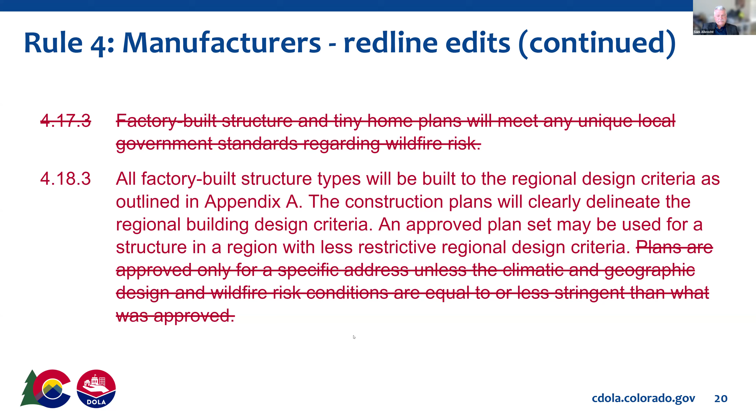Approved plans are considered approved until the division amends Chapter 2 Codes and Standards. I might actually need to change that to 'rulemaking' or 'the State Housing Board amends Chapter 2 through a rulemaking process,' because the division cannot amend those rules.

Now we start talking about audits. Manufacturers may be audited per procedures established by the division. I want to stop here for a second to discuss this. What I'd like to do is recommend to the TAC that we take the audit details out and move them into a separate document, where we have flexibility at the division level to make changes in frequency or the audit process, taking that outside the administrative rules.

If that is a concern for anybody, or if the manufacturers have seen better models in other states, let me know. If it's a concern, we could put in what our minimum audit procedures are, subject to division increases as necessary to ensure quality control and life safety issues. We could come up with some wording to change that a little. But what I'd like to do is have the procedures set out separately for manufacturers in a separate document, very similar to our MHIP for installation. That's a separate document that we control on our audit procedures.

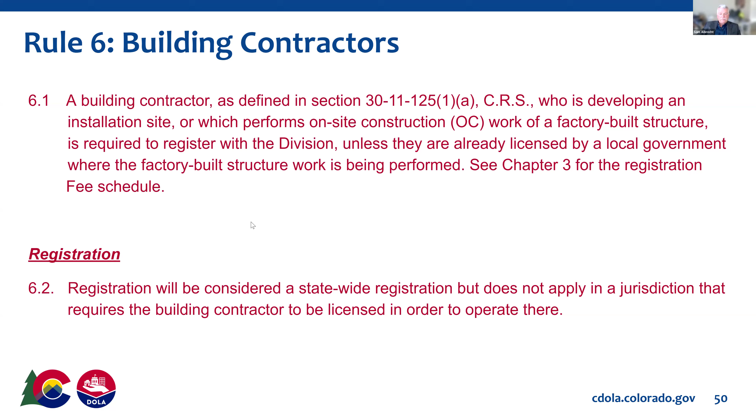We're throwing this out for input also on proof of general liability insurance, a minimum bond, names of principals of the company, proof of factory-built structure education provided by or through the Division of Housing, and we probably need to add here, or other approved education providers, and certificate of good standing from the Colorado Secretary of State.

Pretty similar to what we learned from finding how the local jurisdictions are doing their contractor licensing.

And then 6.4 is the contractor education requirement that will be required of all general contractors working on factory-built structures, whether or not they are licensed by the state, registered with the state, or licensed by a local jurisdiction. All contractors will have to take this education.

Now, the responsibility of that, we tried to talk through that a little bit. Building contractors may be responsible for the following activities. And then who's going to be doing that?

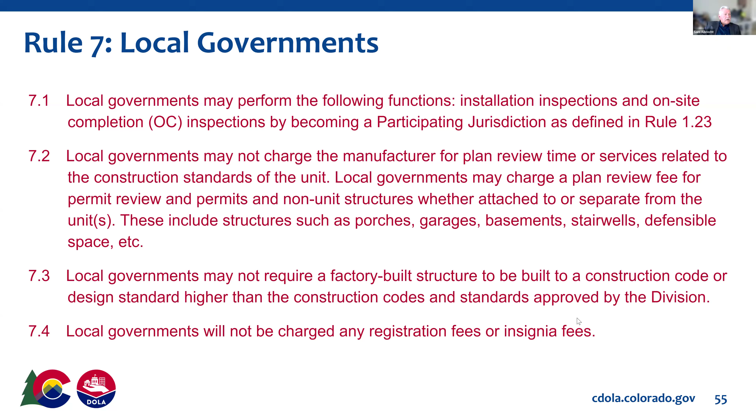Other state agencies: the division is responsible for all factory inspections for in-state and out-of-state factory construction. This includes electrical, plumbing, gas, construction, fire suppression, and wildfire structure hardening. Under 8.2, the division is responsible for all inspections related to completion and installation of the unit on site. Connections to utilities is the responsibility of the local jurisdiction, which may defer these to other state agencies such as DORA and DFPC. I break it out specifically by plumbing connections.

I mentioned also, and I want to revisit this if you didn't catch it: the installation of gas piping on the service must be completed by a qualified gas piping installer. That was in the statute, but from my understanding, I seem to recall a discussion about whether or not a qualified gas piping installer existed.

Can anybody refresh me on that? Tim? That was my question. I'm not familiar with any. Well, it's not on the state side. John, I see John's there.

At the plumbing board, plumbing rules exclude gas. So a non-licensed plumber can do gas line, residential and commercial, and the same thing with inspections, at least from local jurisdictions - you don't have to have a licensed plumbing inspector do the gas line. So that was a couple of comments to get clarified. Maybe John's got his hand up. Thanks. Yeah, John?

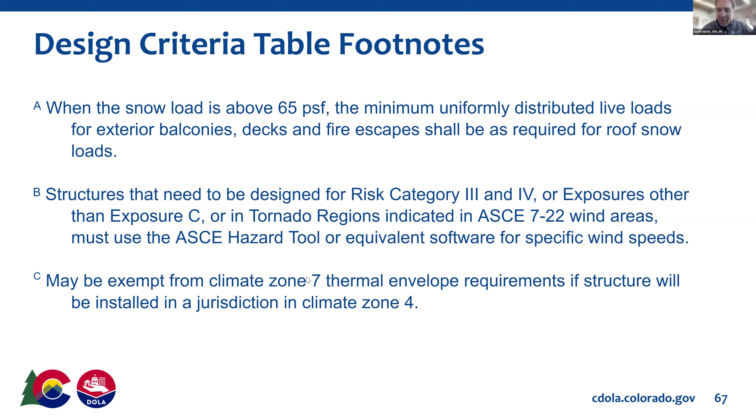But if I'm a factory and I want to build at spec, say a dozen single family homes that meet a 60-pound snow load, which puts me in the chart - it's off now so I haven't memorized it - whatever zone that 60-pound falls in, and whatever zone a 130-mph exposure C wind falls in, and so forth, I can go ahead and build a dozen homes meeting that criteria, and those homes can go in any location in the state that meets up to that design criteria. So that's my understanding of the real purpose of going through this exercise. It's going to be for the benefit of factories to be able to, maybe not mass produce, because there'd be some risk of that, but stock certain plans that they know can go into certain locations. And when we look at it through that lens, this makes a lot more sense.

Because, to Justin's point, otherwise I'm just going to design to the actual local criteria for a large complex project, since it doesn't benefit me at all to over design in any category. Similarly, it's hard to imagine any factory prefabricating multifamily modular units in hopes that they might actually sell that type of product in a specific location, if that makes sense.

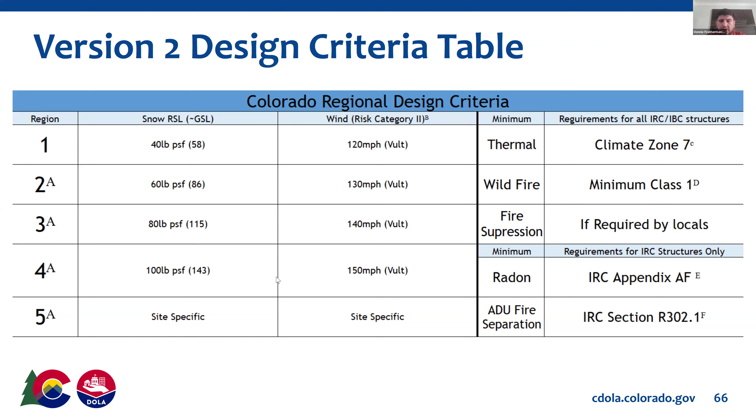Yeah, and thanks for that, Dean. I was alluding to that, and I think you did a better explanation than I did. But again, if the concern is to be able to reduce or do a reduction on a design load, then that's where Region 5 comes into play. If you don't want to design to that prescriptive method, you want to design to site-specific information, you still have that ability through Region 5, and you can do a reduction based on that. So it fits under Region 5.

But if you say, hey, I want to do mass production, or I want to build like 10 of these units off of one plan, then you just use the prescriptive method. But maybe we should make it clear that there is no reduction for wind pressures there, just so that we don't have them putting a reduction up front and then getting that approved that way. Okay, but let's still talk about that a little bit more.

Okay, all right, let's see here. Oh, okay, here we go. I was thinking we're on the same thing here.

All right, so D for wildfire. I think this one's for wildfire mitigation. May be exempt if the Colorado Wildfire Resiliency Code map, or a locally amended map approved by the Colorado Wildfire Resiliency Code Board, classifies the location where the structure will be installed with no hazard. So this is for the minimum class 1 hazard structure. If you went with class 1, you know it will fit in all class 1 areas and any location that doesn't have a specific hazard.

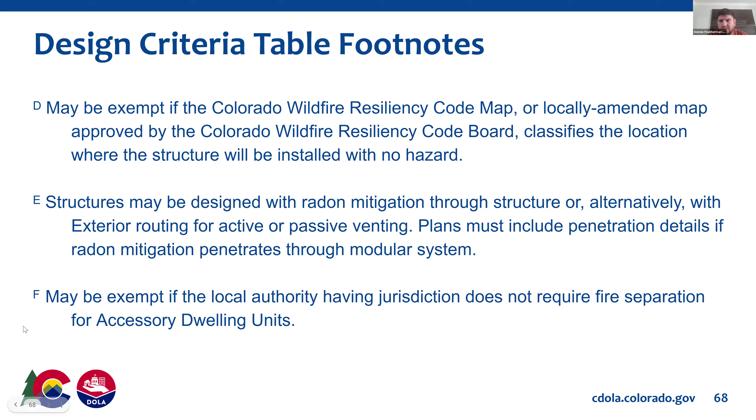This is for those jurisdictions that have written into their rules or ordinances that they consider these structures on the same lot, although it's specific to IBC. I guess the requirement itself, they might see it being the same type of thing for residential. I know there are jurisdictions that are like that, and that's why we wanted to put this in there, that they don't consider them two separate structures in the sense of needing, like a duplex. They wouldn't require fire separation between the two. So we put that footnote in there.

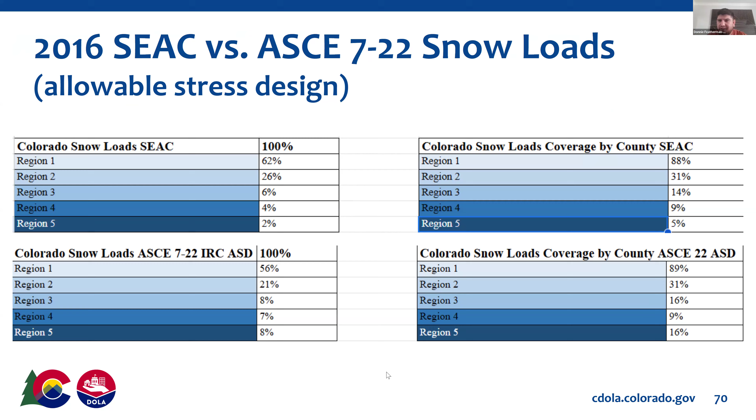Raise your hand if you're confused, but we can move to the next slide if we're good. Yeah, Donnie, we got to rock through this stuff. Okay, I've got 10 minutes left.

Same tables as last time, but the bottom two tables are based on a report that I ran in our system for commercial and residential plan reviews. This specific slide shows the tables for commercial. You'll see overall, on the bottom left, the overall report: 63% of the structures submitted to Colorado fit within region 1, 21 in region 2, 7 for region 3, 5 for region 4, and 5 for region 5.

So go ahead and go to the next slide. This is specific to residential, same thing. The top two tables are the same as the previous slides. The bottom left here is just the overall report of all the structures. But on the bottom right, this is specific to IRC structures submitted to Colorado. You'll see that 49% fit within region 1, 31% in region 2, 9 for region 3, 10 for region 4, and 2% in region 5. So residential wise, there's not a lot of region 5, or you wouldn't need a lot of site specific if you follow the table.

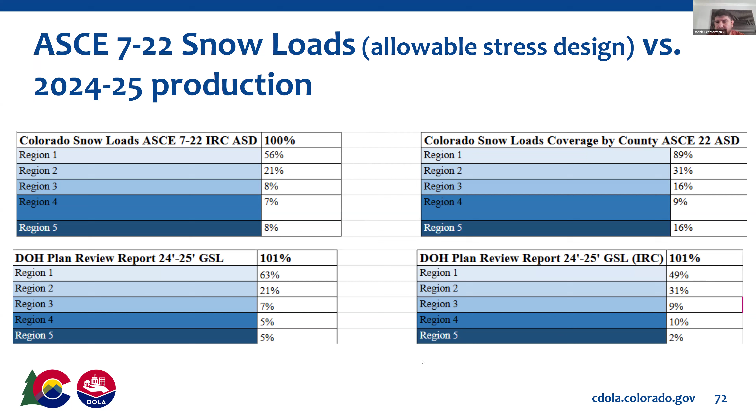All right, and I think that's it. So we have a slide in here on fire suppression. There's some easy decision items, and then there's some hard decision items. I think we're going to defer this discussion in the interest of time, so we'll bring this back.

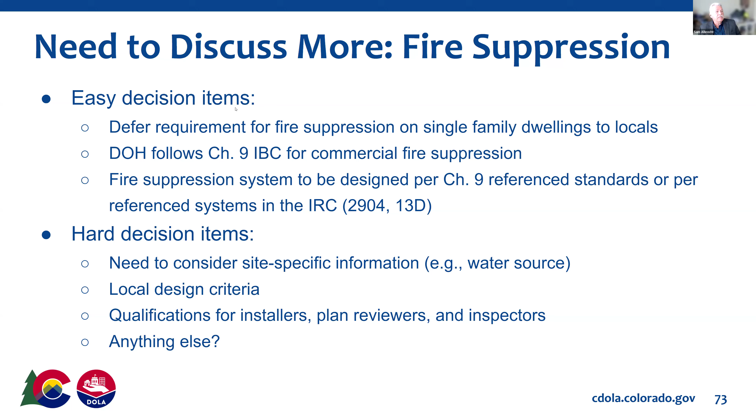Donnie, is there anything else you wanted to say on this slide? No, we can get into more details on this on the next one, but please review this slide for those items. So some homework: look at this slide, also look at the winter design temps slide here.

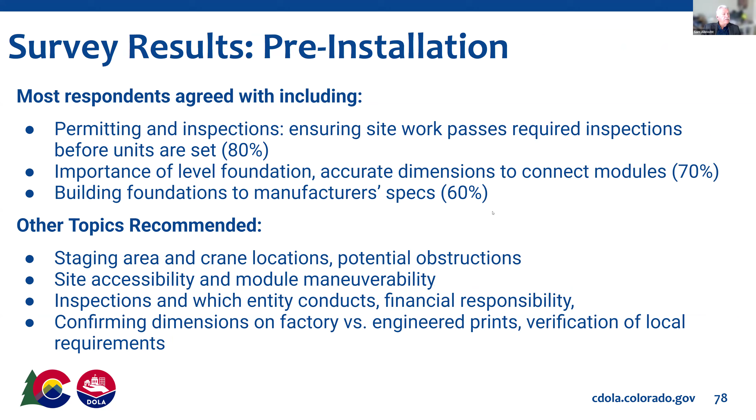So these are the slides that kind of summarize what we found so far from the survey, and I'll echo Heather in thanking you guys for completing the survey. We'll bring this back and kind of summarize maybe with an outline of what we are thinking with respect to contractor education.

Our next steps on this is that we're going to decide if we're going to partner for delivery in-house or contract out with that. So we kind of need content and what our expectations are. And we have talked to several different providers that make sense on having learning management systems in-house in order to possibly do that as an on-demand system, or we take a look at live training.

And we get down to rulemaking schedule, just a friendly reminder. March 11th is when we are expecting to send the final rules to the TAC and interested parties, and then March 18th meeting finalize those proposed rules. And then we file that notice on March 31st for rulemaking, and then we have the public hearing on May 5th, and then it's just publication after that. Permanent rules in effect June 30th.